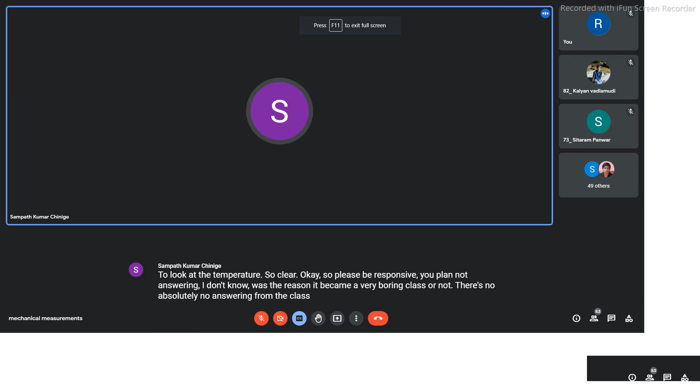We will end these online sessions hopefully with this semester, if no other variant or no other threat comes in. I hope next semester everyone will be back to the institute and we will resume our regular classes. In today's

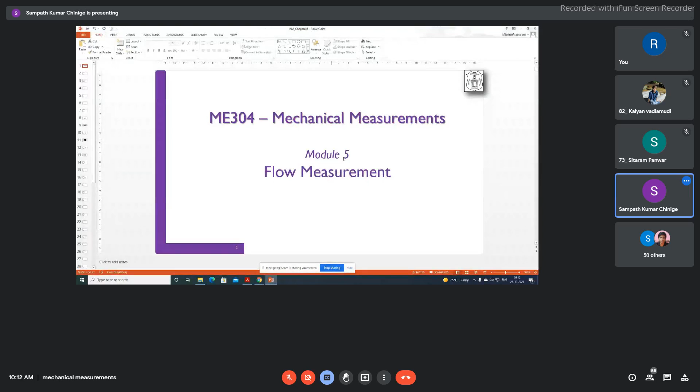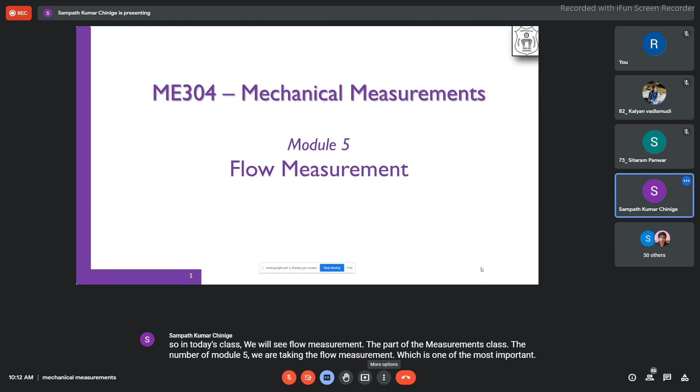So in today's class, we will see flow measurement. As a part of the measurements class, module 5, we are taking flow measurement, which is one of the most important parameters that we want to measure in the process industry. It has various applications. It many times involves cost.

For example, the measurement of flow may be required to be crude in nature. That means very accurate measurement may not be required many times. But at times, for certain applications, very accurate measurements are required. For example, if you take the petrol industry, if you go to a petrol pump or a gasoline pumping station,

if the flow measuring device is not very accurate, if you are supposed to get 1 liter into the vehicle, and you are sending every time 1.10 liters, it is directly involved with the cost of the material. So your costs will increase like anything. So there are certain applications like what I have mentioned, which take a very accurate measurement.

And there are other applications, in a country like India, where we have perennial rivers, where due to the population explosion, now we are using water meters for every house. We are kind of controlling the amount of water that is being supplied to the houses. So there, instead of 1 liter, 1.1 liter is not that costly because we have a sufficient amount of rivers, so very accurate measurements are not required in that case.

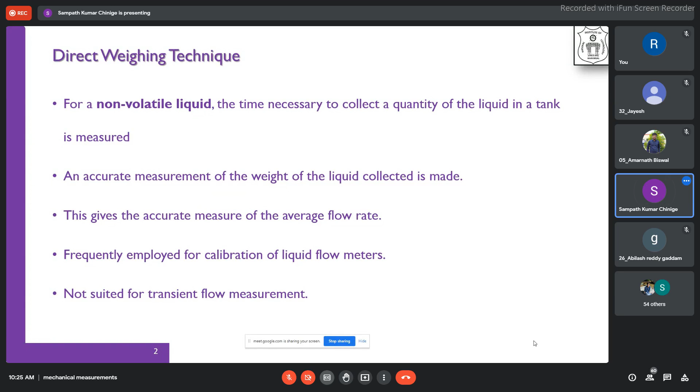So just collect the amount of water for a particular period of time, and you also look at the reading that you are getting from the measuring device. So how much is the variation? That will set up the calibration curve for that flow meter, so that whatever the errors associated with the flow meter can be corrected. However, this direct weighing technique is not suited for unsteady flow measurements. As I told you, this is best suited for steady state flow measurement.

Okay, so in this particular module, we also try to look at various instruments which work on various principles for measuring the flow. The basic classification is like this. The first classification is based on the working principle of primary or quantity methods. So you are trying to measure the basic primary or quantity methods, and by using that, you will be able to find out the flow. For that, we generally use weight tanks and volume tanks, graduated cylinders, bell provers, and so on. These are all similar to what we have discussed.

So the second classification is mechanical flow meters, where you are using obstruction meters. That means we are trying to obstruct the flow. We are not having the flow continuously pass within the same cross section of the pipe. Instead, we are varying the cross section of the pipe. Due to the obstruction or change in the cross section of the pipe, there is a pressure difference created, and based on the pressure difference that we measure with other devices, we estimate the flow rate through the pipe.

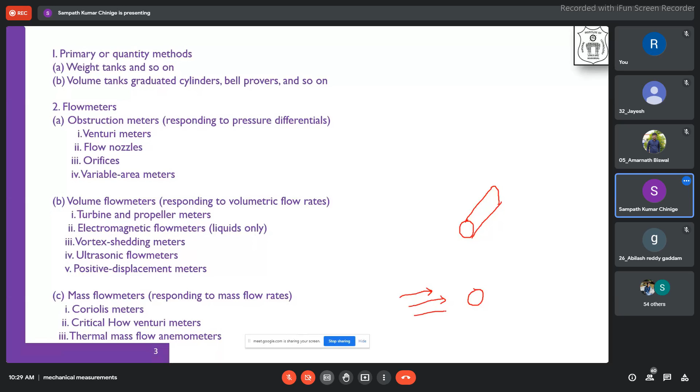For simplicity, imagine you have a bluff body, a circular cylinder, horizontal, shown here in a 2D diagram. Now there is a flow that comes in. When the flow comes, it stagnates and then goes. Depending on its velocity, it creates vortices at the rear end of the cylinder. The amount of this vortex formation is what we call vortex shedding.

The more circulations we create, the higher the velocity, the more vortex shedding happens.

Now we also have ultrasonic flow meters. In the vortex shedding meters, the amount of vortex formation is measured with the help of sensors. The more the vortex shedding frequency we find, that is directly proportional to the velocity of the flow, and we know the area of flow. So area into velocity gives us the flow rate. This is one example of volume flow meter devices.

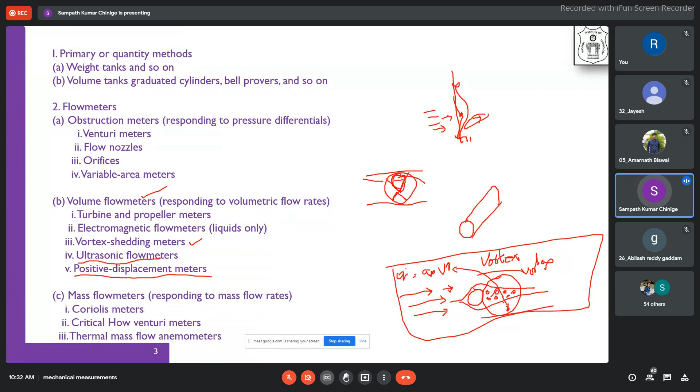In a positive displacement meter, we have a pipe and we try to obstruct the flow with certain devices. These devices allow only a fixed amount of fluid every second, and because of this velocity, they keep on rotating. So every time, at the outlet, we have a fixed amount of fluid coming out, but the rotations that happen depend on the velocity of the fluid.

If it is only 10 liters per second, and every time it sends one liter, it will rotate 10 times per second. Suppose it is 100 liters per second, then in a second this meter will rotate 100 times. There is a counter mechanism to find out the rotations of this device's axis. Since every time it only sends out 1 liter, the number of rotations helps us find out the flow rate. These fall under the category of positive displacement meters.

Coming to advanced flow meters, we have very accurate devices like Coriolis meters, critical flow venturi meters, and thermal mass flow anemometers, which we are not discussing in detail. The Coriolis flow meter works on the Coriolis principle provided by Coriolis, and it is one of the most accurate flow meters available today. Those interested should go through the principles of the Coriolis meter, critical flow venturi meters, and thermal mass flow anemometers. These are the recent advances in flow meter devices.

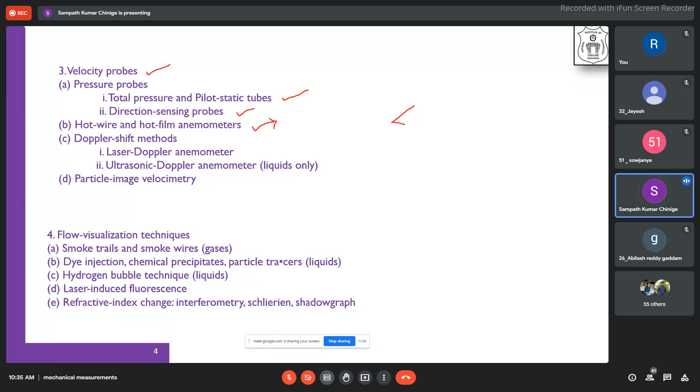You have a small thin wire over here. Through this wire we are sending some current constantly, through a circuit. So because of the flow of current, some resistance gets developed, and because of this resistance, the wire gets heated up.

Now we have kept it inside a fluid flow, like a gas. So when this fluid flows over this small wire, which has current flowing through it and is heated up, because of the temperature of the fluid flow, it gets cooled down.

Now when it gets cooled down, automatically the resistance will vary because of the temperature, and therefore, to get back the same initial conditions, we have to increase or decrease the current that is passing through.

So the amount of current that is increasing or decreasing is directly proportional to the velocity of the flow. If we know the velocity of the flow, we can automatically find out the discharge of the flow passing over the hot wire. That is the principle of hot wire or hot film anemometry.

And then we have Doppler shift methods, just like what I discussed previously. We have a Doppler signal, and we check how much the angle or frequency is changing, how much variation is happening in the signal, and what phase angle change is occurring. Based on that, we use these Doppler shift methods.

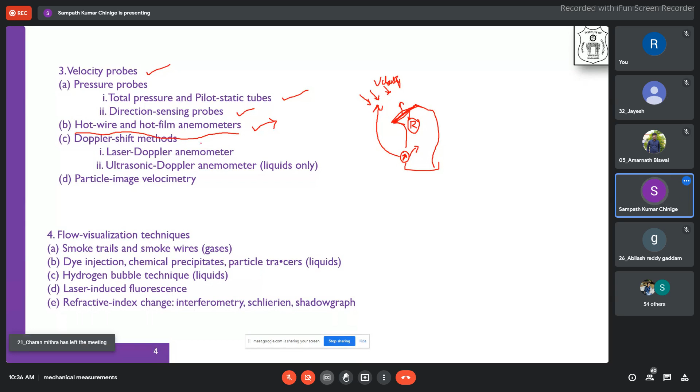Another important and very widely used technique in research is particle image velocimetry. Here, certain materials are kept in the fluid flow, and we track those particles using light or laser, so that flow visualization can be done. We can also trace the particles and, through post-processing the video, find out the velocity and flow rate passing through the pipe.

So these are basically flow visualization techniques, meaning you are also looking at how the flow is taking place. Suppose if it's a gas, you may not be able to see it with your eyes, so these particle image velocimetry techniques will be helpful for finding that out.

We also have cruder flow visualization techniques like smoke trails and smoke wires, dye injection, where colored dyes are kept in the flow so you can trace how it is happening, hydrogen bubble method, laser-induced fluorescence, refractive index change, interferometry, and Schlieren or shadowgraph technique. These all come under flow visualization techniques used to determine fluid flow rates.

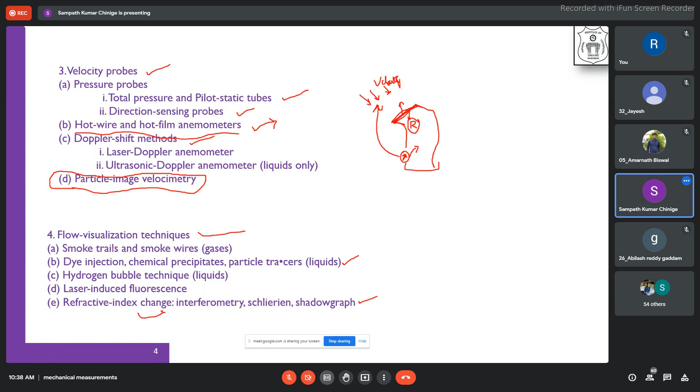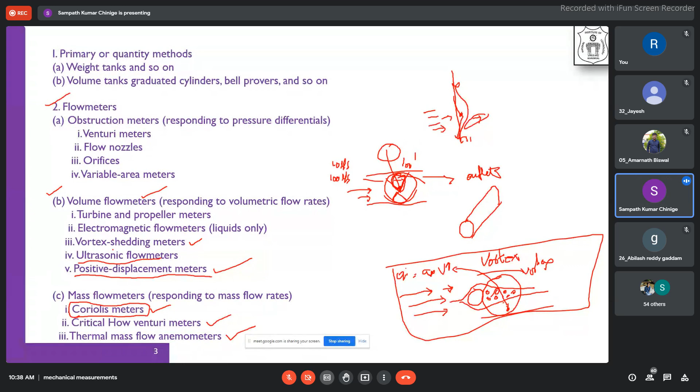So these are all the different classifications of flow meters available in the market for us. Having a basic understanding of these instruments is of vital importance, because you may be doing experiments in the future. If some of you go into higher studies or into the process industry, flow rate is one of the key parameters monitored there, so having a basic understanding of these flow meters is of utmost importance.

Now let us start with flow meters, like positive displacement flow meters. There are many types of positive displacement flow meters. The very working principle is that it measures the volumetric flow rate of a moving fluid or gas.

There is a pipe, and the flow meter is placed in it. So this is the pipe, initially. Now what I'm trying to do is cut it and include this kind of meter into it, let us say this meter I am trying to include.

Okay, just assume that this is the device. So I am trying to connect this. Imagine that this is a connection. So for a pipe, continuous pipe, I am fitting this device, okay?

What I am trying to do here is find out the flow rate of the moving fluid or gas, both. It can work with both liquids and gases. By dividing the media, whatever flow is coming in, that amount of fluid, I am dividing it into fixed metered volume. So I am not allowing the full fluid to go into that. At a time, only a fixed amount of fluid I am allowing to pass through this device.

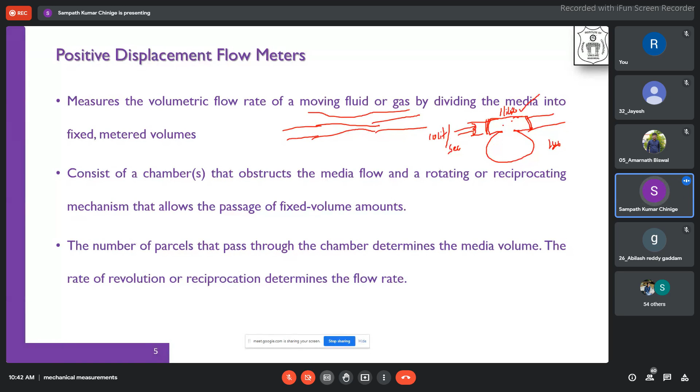Such that the whole volume of fluid, only a fixed amount of fluid, is allowed inside each time, and that is exited through the end of the pipe. So the number of parcels that passes through the chamber determines the media volume. As I told you, the number of times the fixed amount is passed through will tell you the total volume. So the rate of revolution or reciprocation is what determines it.

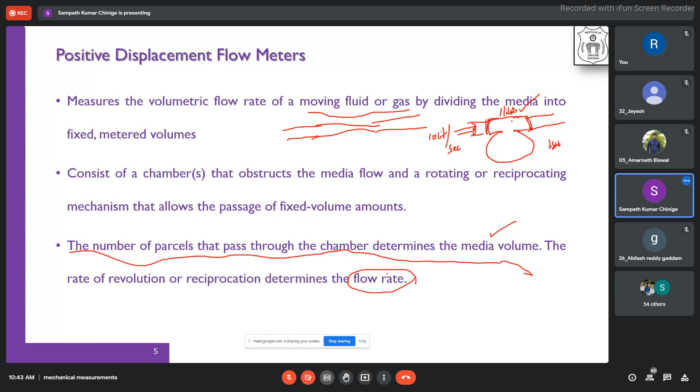Okay, so that is the basic working fundamental principle in this positive displacement flow. These are very precise instruments, and since we call them precise instruments, the inside part will have very precise arrangement, fabrication techniques required. So the internal moving components like the reciprocating parts or the rotary parts, they are hydraulically locked in tandem with the volume of fluid. So there may not be any chance for leakage of the fluid to happen, since we are holding down a fixed amount of fluid.

For example, we will come to know once you see that. For example, you have this lobe kind of thing. So every time the liquid comes in, this is the inlet that is connected, and this is the outlet. So every time this comes in, it fills this particular chamber, and applies force, and while it is moving, it passes through. So the next chamber comes over here, and it rotates, and it's the same thing. So this fixed volume of liquid should be equal to this fixed volume, and that should be equal to this fixed volume, and that should be equal to this.

So that is what we have to fabricate very, very carefully. There should not be any variation between this volume and this volume. So then obviously you are going to get error if there is some difference in the volumes.

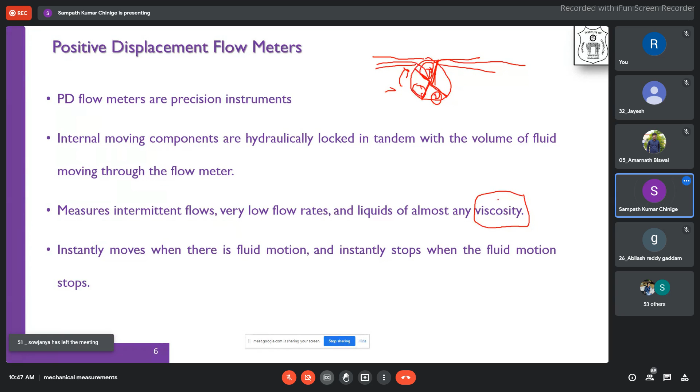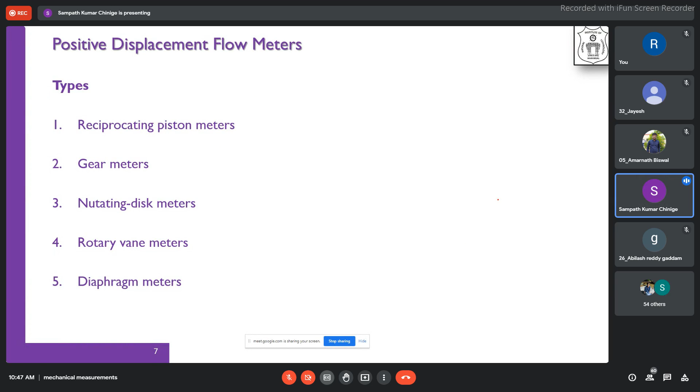So what are the types of positive displacement flow meters? We have the reciprocating piston meter, second the gear meter, third the nutating disc meter, fourth rotary vane meters, and finally diaphragm meters. These are the 5 different types of flow meters available under the positive displacement classification. So let us have a look at the reciprocating piston meter.

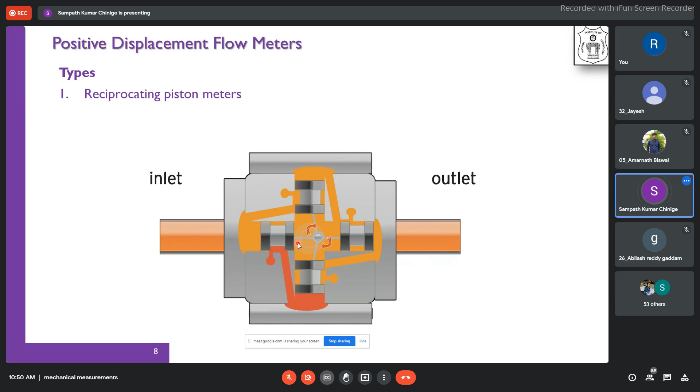The number of rotations of this shaft is noted with the help of a sensor. The sensor counts the rotations, and we know how much liquid is pumped per rotation. So multiplying the number of rotations by the volume passed in one complete rotation gives us the flow rate passing through the pipe. So I am showing the animation here.

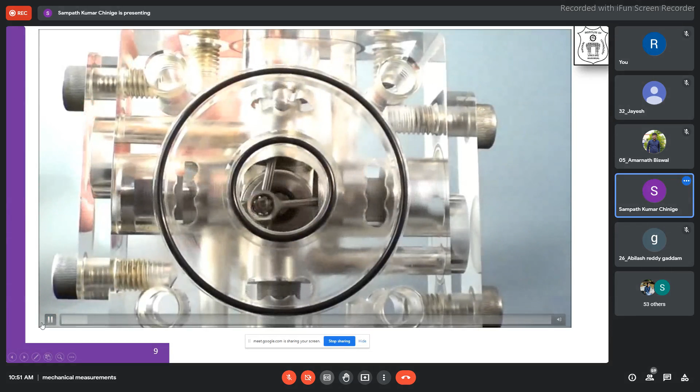You just have a look at this, how it works. Known-sized pieces. Each rotation allows the same amount of fluid to pass through the meter. So you can see here that the piston displacement is not affected by the fluid's viscosity, density, or flow profile. You can see here these two valves are moving simultaneously to the top or bottom, and these two are moving to the left or right simultaneously. And we do have certain passages over here. Depending on the flow, this will be pumped through outside.

Just have a look at this video. It is self-explanatory, and I hope you are able to listen to the audio. Is it audible or not? Yes, sir, audible. The video voice is also audible, right? Yes, sir.

Liquid enters through the base of the meter and it travels into the center cavity below the base of all the pistons. As the meter rotates and moves one of the pistons forward, the porting tube is connected to the center of the meter. This allows the liquid to flow down the tube and displaces the adjoining piston. As that piston reaches the end of its travel, the porting tube is sealed off from the center of the meter and connected to the exhaust port. Each piston has its own exhaust port that is connected to the outer ring in the meter's base. Fluid collects in this ring and exits through the meter's outlet port.

Each piston carries over a known amount of liquid from the inlet to the outlet side. The pistons act as valves and displacement devices. By connecting them to a central crankshaft, the pistons are sequenced to continually divide up a flowing stream into known-sized pieces. Through the use of a precision encoder, the crankshaft's rotation is converted to a high-resolution electrical signal, which can report the flow with high accuracy and repeatability.

So I'm again playing the same thing.

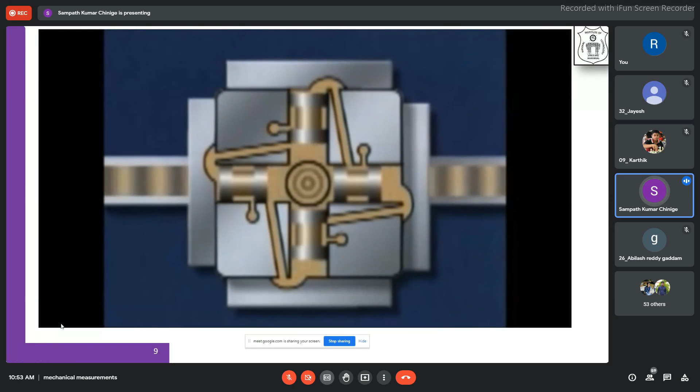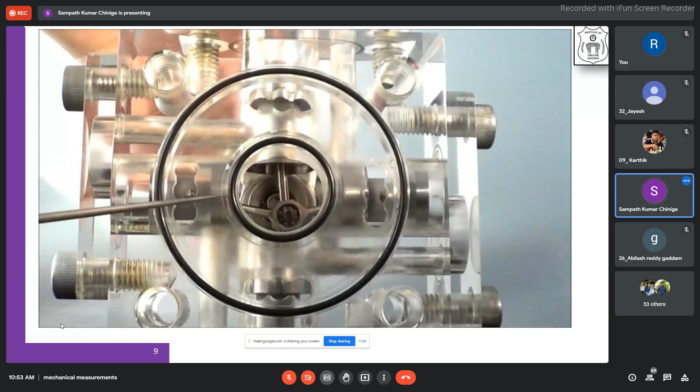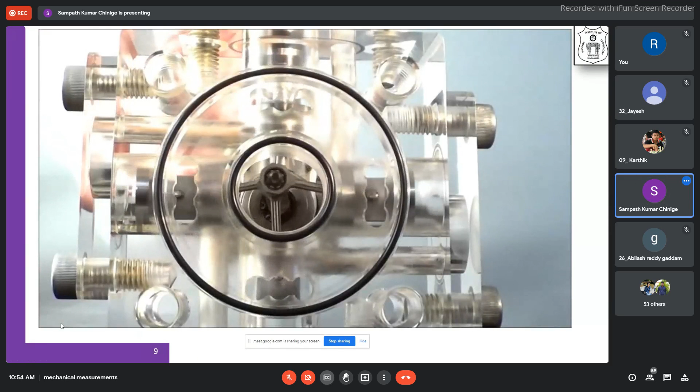Known-sized pieces. Each rotation allows the same amount of fluid to pass through the meter, with the added benefit the sum of the four piston displacements is not affected by the fluid's viscosity, density, or flow profile. Liquid enters through the base of the meter and travels into the center cavity below the base of all the pistons. As the meter rotates and moves one of the pistons forward, the porting tube is connected to the center of the meter. This allows liquid to flow down the tube and displaces the adjoining piston. As that piston reaches the end of its travel, the porting tube is sealed off from the center of the meter and connected to the exhaust port. Each piston has its own exhaust port connected to the outer ring in the meter's base. The fluid collects in this ring and exits through the meter's outlet port. Each piston carries over a known amount of liquid from the inlet to the outlet side. The pistons act as valves and displacement devices. By connecting them to a central crankshaft, the pistons are sequenced to continually divide up a flowing stream into known-sized pieces. Through the use of a precision encoder, the crankshaft's rotation is converted to a high-resolution electrical signal, which can report the flow with high accuracy and repeatability.

Okay, so we are using electronic devices called encoders, which help in calculating the number of rotations, the RPM of these shafts. We can also use tachometers at the end of the axis, and you can also find it out manually. But in general, it is not possible to do it manually all the time. So in general, we will have these electronic encoders to measure the rotations of the shaft.

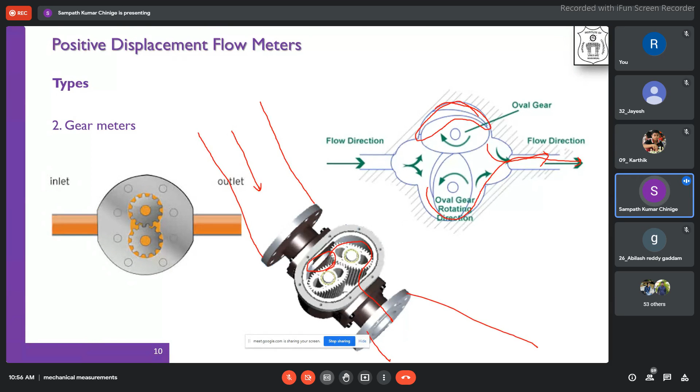And the number of rotations of these two gears we will be able to measure with the help of the encoders, and that is how this gear meter will work. So since we have used gears, it is called a gear flow meter. Now have a look at this particular

animation. As this simplified illustration shows, there are two oval gears inside of the meter. The flow of the fluid causes the gears to rotate. As they rotate, specific amounts of fluid are trapped in the chambers between the gears and the meter body. So each time the gears rotate, a precise amount of fluid is passed along.

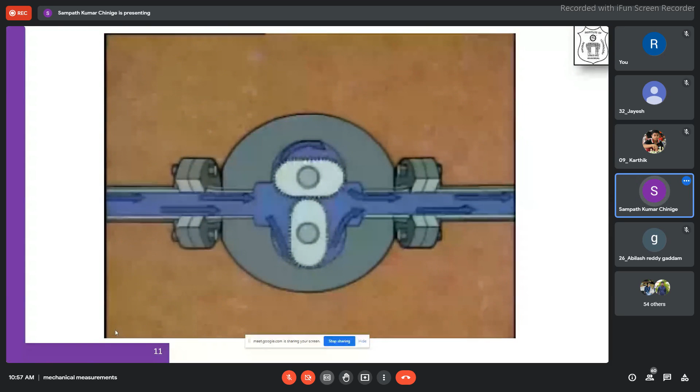If the flow increases, the gears speed up, but they still pass the same precise amount of fluid along with each rotation. A counter mechanism counts each rotation of the gears to determine the total flow of fluid through the meter.

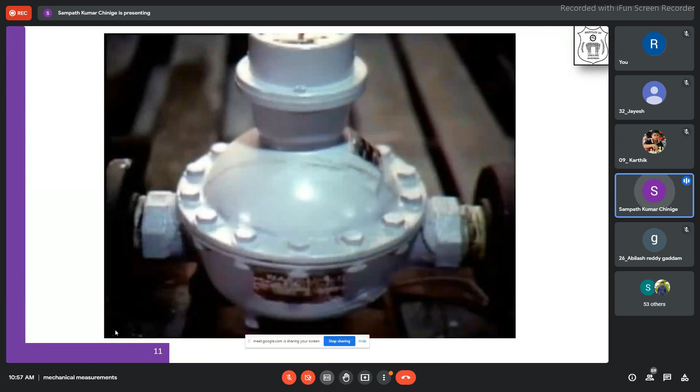Another example of a flow meter that measures flow directly is this nutating disc meter. It gets its name from the action of the disc. Now we are also looking at the nutating disc meter. This is another example of the positive displacement flow meters.

So here there is a nutating disc, that means it wobbles top to bottom. You can see it will move in this direction to only this direction. So it wobbles because of the flow that is coming in, and this wobbling is measured with the help of this encoder to measure how many times it wobbles. But every time only a fixed amount of fluid passes out through the meter.

You can watch this animation, which can be seen here. The word nutate means to wobble or roll about an axis of rotation. During operation, the disc rotates much like a slowly spinning top. As the disc rotates, specific amounts of fluid are trapped above and then below the disc.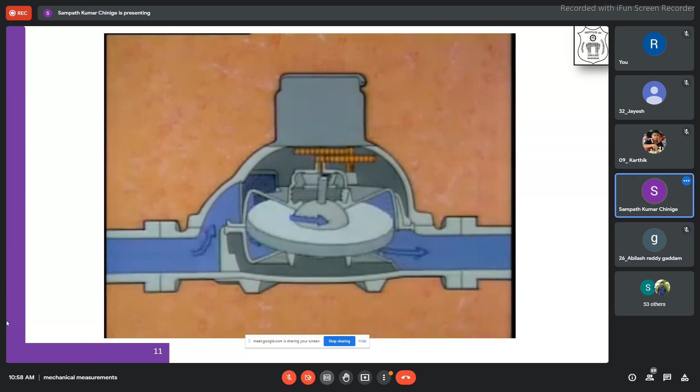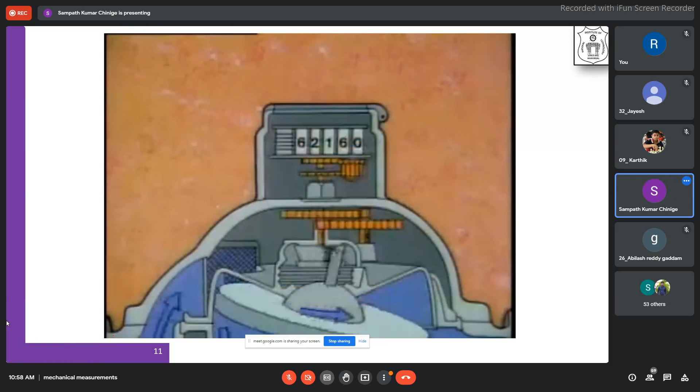An increase in flow will cause the disc to rotate faster, but the same amount of fluid will be passed along with each rotation. The nutating disc meter counts the precise amounts of fluid passing through it to determine total flow. Okay.

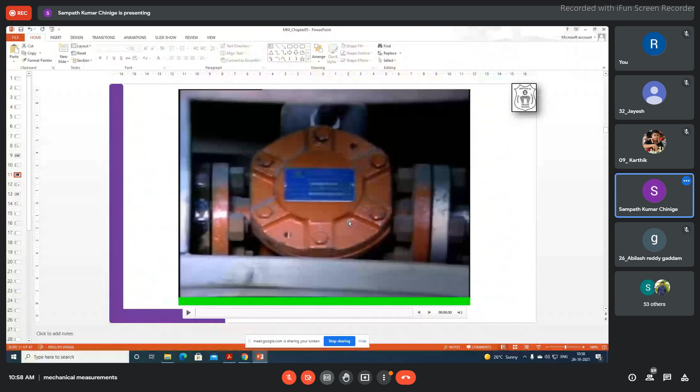So this is one example of the nutating disc meter. You can see here the example I have given. The fluid that is coming in passes through only on the top, and because of the amount of fluid it wobbles, and you can see here, from this side, it is coming and it wobbles, and every time it is passing through it.

The more the velocity, the more it wobbles, and how many times it is wobbling, you can see this black color thing will actually measure this. Okay, so this is the working principle of these nutating disc meters.

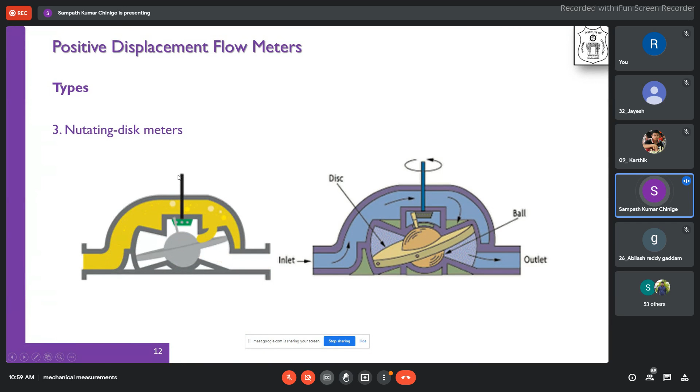Water flows directly into the meter housing. The water first flows through the meter's internal strainer before it enters the measuring chamber. The strainer protects the measuring chamber from damage due to debris in the water. Inside the chamber assembly is a movable disc that's located on a sliding ball guided by a thrust roller.

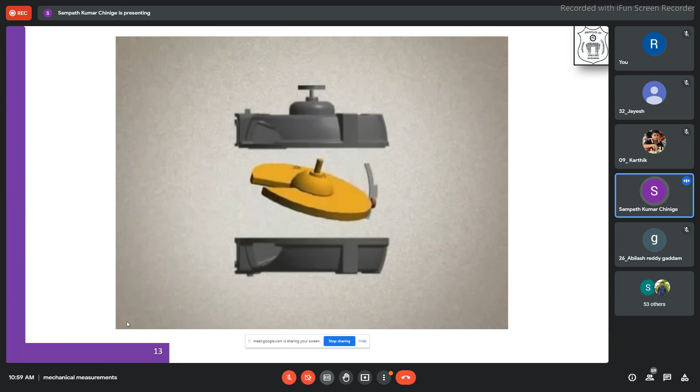As the water flows into the measuring chamber, it causes the disc to nutate, a motion similar to a coin dropped on a table. Notice that the disc does not rotate, but rather wobbles on its axis. Therefore, the space formed between the disc and the chamber wall has a constant volume as it moves around the chamber. The water in the chamber is a fixed volume, or displacement. That's why a disc meter is called a positive displacement meter.

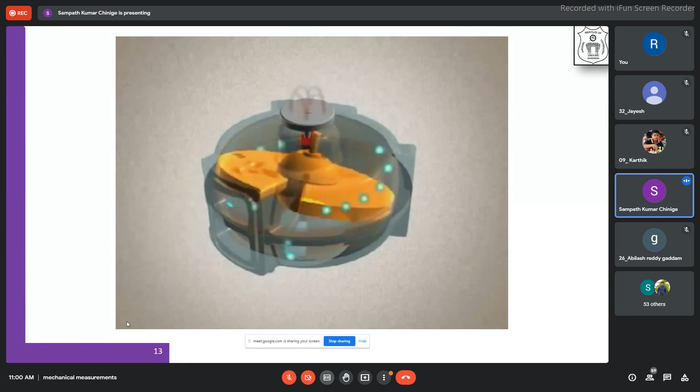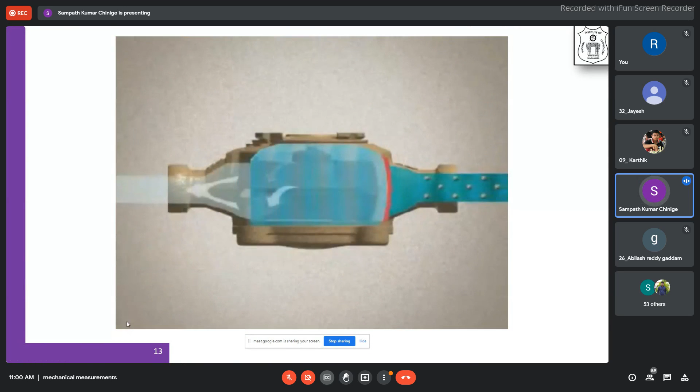The smooth motion of the disc also eliminates the annoying noise produced by some other types of positive displacement meters. As this happens, the nutating disc translates its movement through a magnetic coupling to the register. The water then leaves through the outlet port of the chamber assembly. Okay, so that is about the nutating disc meter.

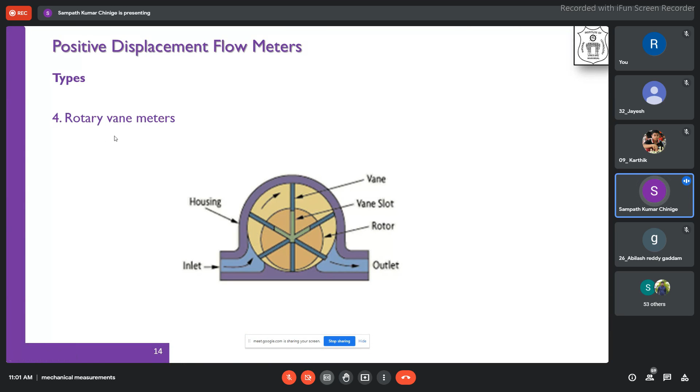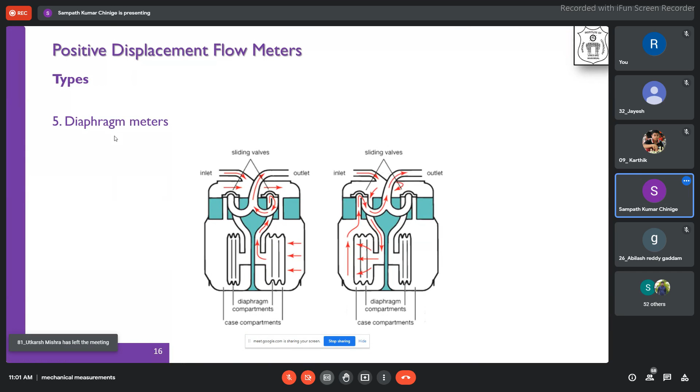And the final thing is the diaphragm meters, which we will see in the next class. Already time is 11 o'clock. So we will discuss about these diaphragm meters in the next class.

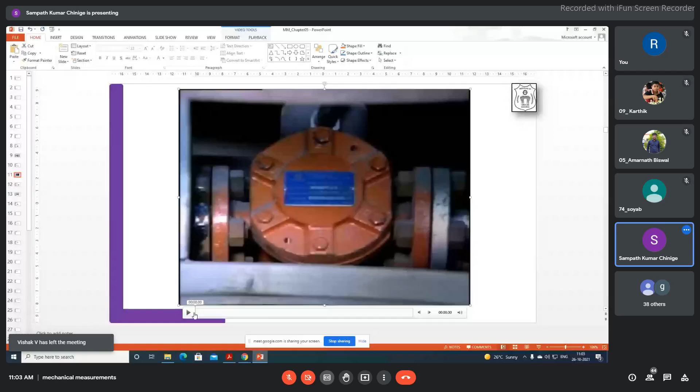As this simplified illustration shows, there are two oval gears inside the meter. Sir, the previous one. Are you asking the reciprocating gears? This is rotary gear meter. You are asking this? No, sir, the next slide, 10th one.

Yeah, this one. So what is the difference between the oval and circular gear we are using? Nothing, but it only changes the volume, nothing more. If you have an oval shape, the amount of volume will be different. If it is a circular thing, the volume will be different. There's not too much of a difference with that. Each time, how much volume you want to have, that will be.

Sir, if the flow is very high, suppose at a stretch flow comes, it can flow centrally towards the flow meter, sir. So it may obstruct the rotation of the gears also, sir. Some regime of flow may strike directly at the center, so it may obstruct the rotation of the gears. You are talking about circular gears, probably. No, sir, I am asking about these oval gears.

In these oval gears, the fluid that comes in, you are saying that it hits at the center. How will there be a rotation? Is that the question? Yes, sir. If it strikes the gear teeth directly, then it will obstruct. Why will it obstruct? You can see here that the amount of fluid that comes in hits this particular gear first. So immediately it will rotate.

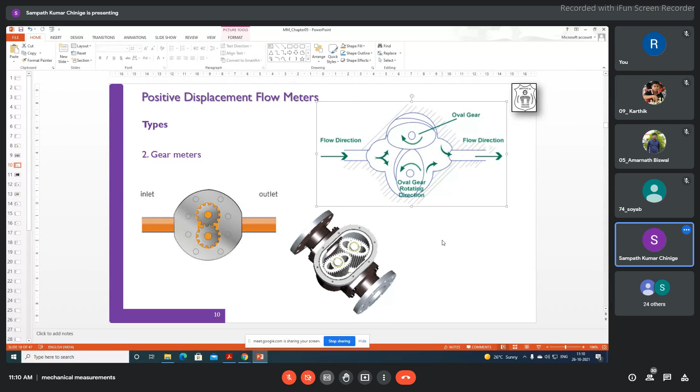Any more questions? No, sir. Anyone? Any other? So as I told you, the Coriolis flow meter is a very interesting flow meter. Those who have interest, not just for the sake of the exam, please go through it and look.

And one more thing: for the A section, Satyanand sir called me yesterday and told me that many students copied in some of the questions, writing the same answer. Suppose 0.1 has to be put in the answer, but somewhere the answer was found to be 0.01, and everyone copied the same thing; he has given 0. He requested me to be consistent, so probably I will also follow the same thing. In the first resistance problem, if R1 is 0.1 but ten people copied the same 0.01, which is not given in the problem, he has given 0 marks. For uniformity, I will also follow the same thing. All right.